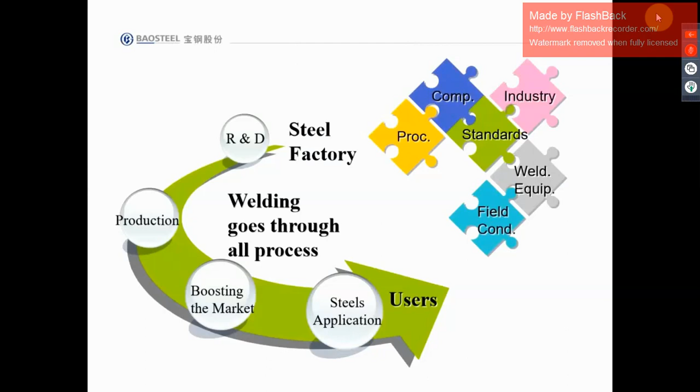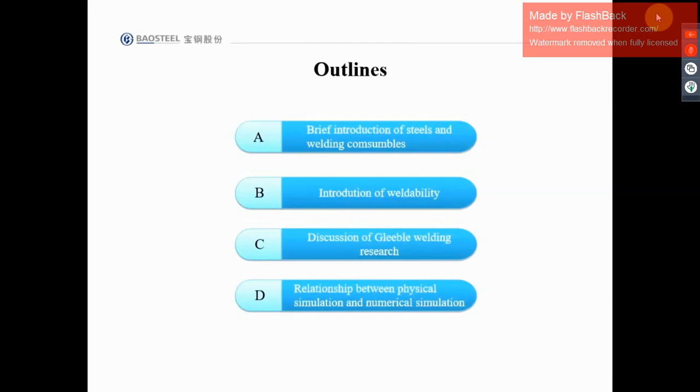There will be 4 parts totally in these slides. Part A is a brief introduction of steels and welding consumables. Part B is introduction of weldability, and Part C is the discussion of Gleeble welding research. Part D is the relationship between physical simulation and numerical simulation. Let's get started. Part A is a brief introduction of steels and welding consumables.

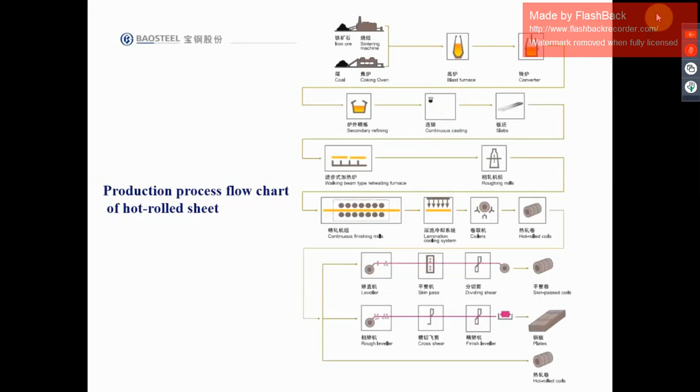This is the production process flowchart of hot rolled sheet, beginning from iron ore and coal and ending in our commercial steel products. Next is our welding consumables.

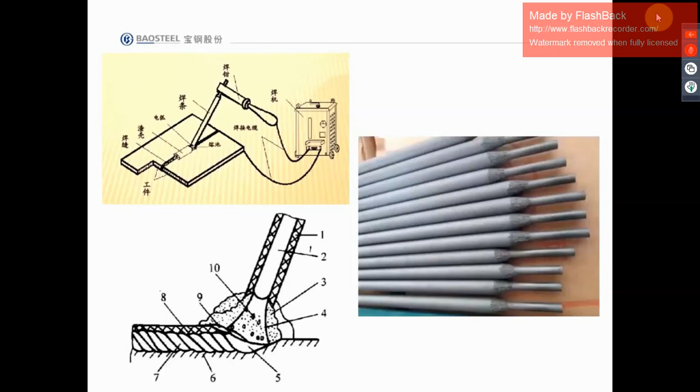This is the electrode of SMAW. The electrode length is about 250 millimeters to 400 millimeters, which are steel rods coated by flux.

This MAG wire is packaged in reels. A standard weight is usually 15 to 20 kilograms. The often-used diameter for it is 1.2 or 1.0 millimeters. Mostly, the MAG welding wire is solid.

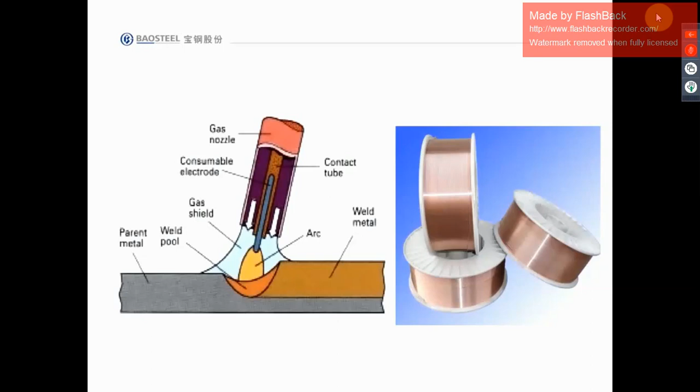For submerged arc welding, the welding consumables are made of welding wires and the matched flux. Of course, there are several kinds of flux, and there are a lot of kinds of welding wire. The biggest difference from MAG wire is their diameter is much larger, usually 4.0 or 5.0 millimeters.

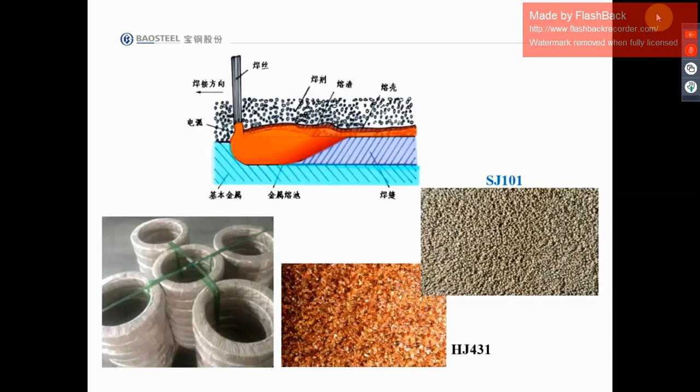For TIG and PAW welding, the welding wire is used as a filler metal, not as an electrode. Usually it is about 1 meter in length, and the diameter usually is 2.4 millimeters.

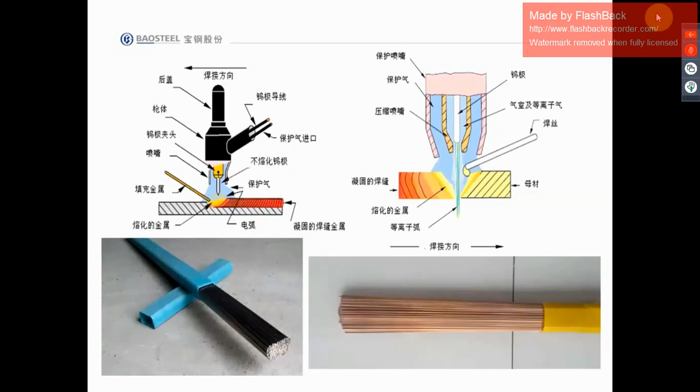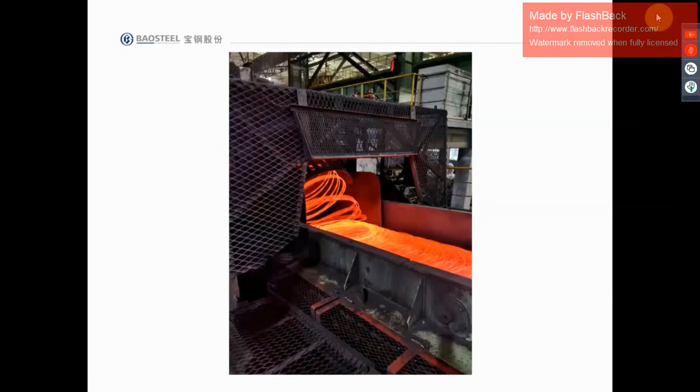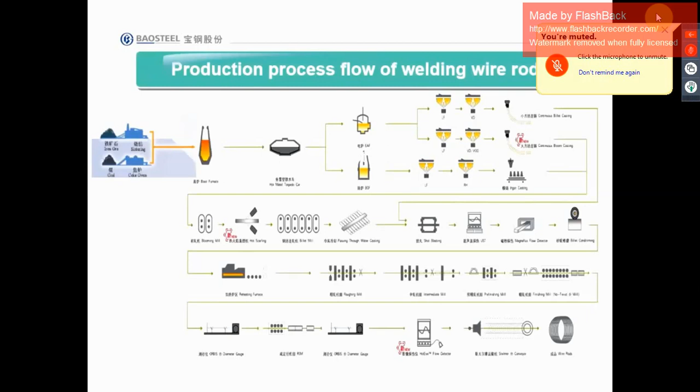This is the production process flow chart of a welding wire rod. It is also the process from iron ore and coal to our commercial steel rod product, very similar to the steel production process.

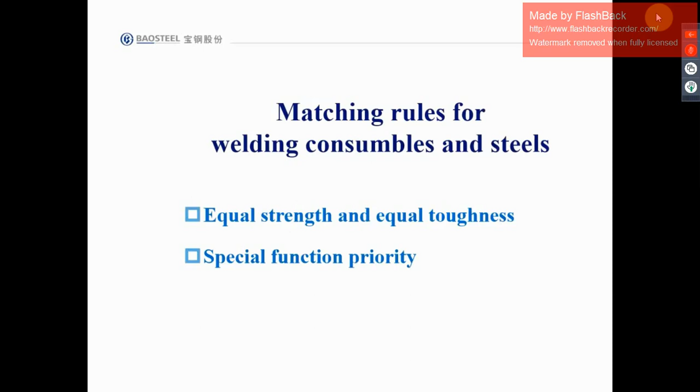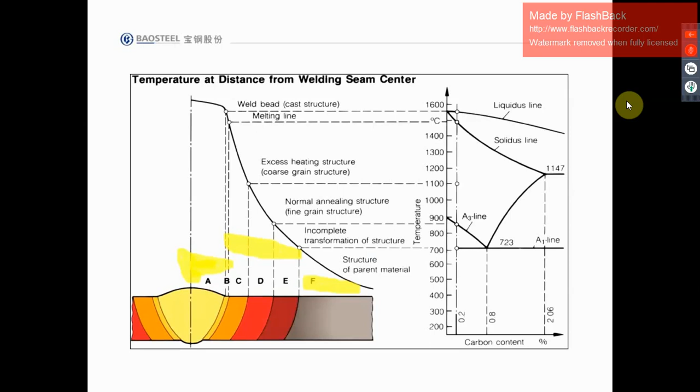What suggestions can be given to improve the properties of the entire joint? This is part A. Next, let's begin part B, an introduction of weldability.

There are two aspects about this concept. One is the sensitivity to weld crack. The other is the range of welding process parameters. For the sensitivity of weld crack, we hope it is as low as possible. For the range of welding process parameters, we hope it is as large as possible.

That is to say, we hope it is large enough, because in that way, welding operators of all levels can do a good job, and our steels can be used in a much wider range of application fields. So the welded joint will have good quality, whatever who makes it, whatever the situation.

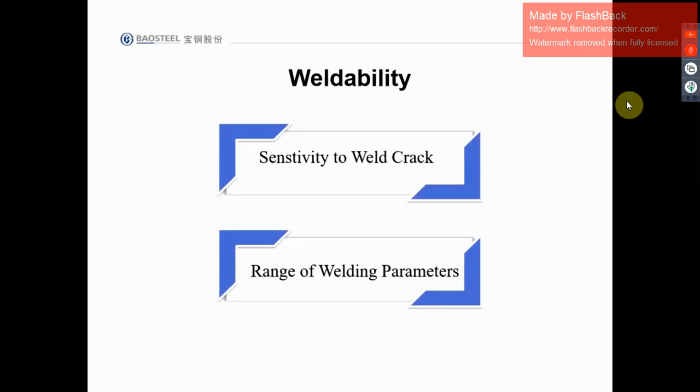In terms of weld crack sensitivity, taking cold cracking as an example, it has three key factors: the first is the hydrogen level, the second is the hardening tendency, and the third is the restraint condition, also called structural constraint. Among these three factors, the hardening tendency reflects the effect of the chemical composition of a steel on its weldability.

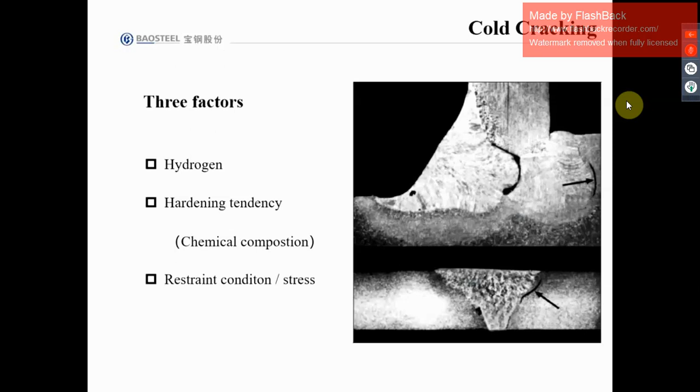As for the range of welding parameters, it depends not only on the SHCCT curve, but also on the range of matched welding heat input, also called the adaptability of different heat input. We hope the heat input is as wide as enough.

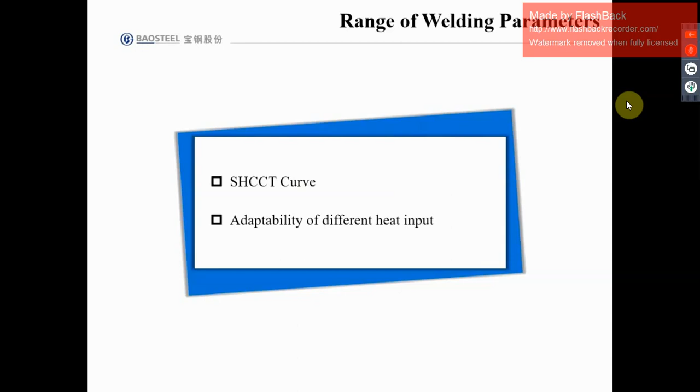Part C is the discussion of Gleeble welding research. This is also the main body of today's topic.

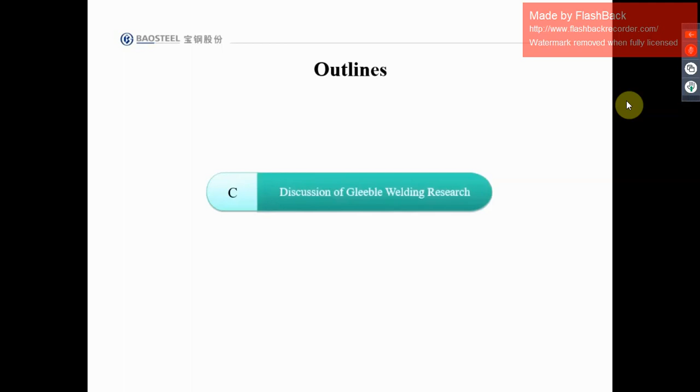Weldability research can be used to direct the composition design of steels and welding consumables. For example, the hot crack tendency can be evaluated by the value of nil-ductility temperature and brittle temperature range, which is obtained from high temperature tensile testing.

The cold crack tendency can be obtained from the test of simulated HAZ hardness.

SHCCT curve is the base of making a welding process specification. The welding process specification we also call WPS. It's very important for our customers to use our products.

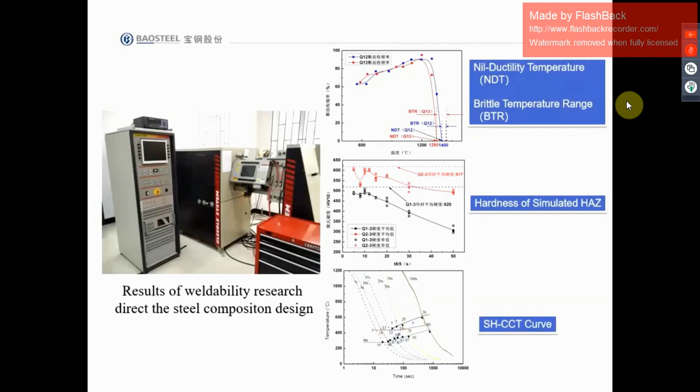Next is a list of some specific Gleeble application scenarios. The first is the microstructure of the simulated HAZ.

We can simulate the microstructure of our interested location in the heat affected zone. The simulation temperature program takes different welding thermocycles with different peak temperature and different cooling rate.

We also characterized with t8/5. In this tester, the samples are usually round.

These are the simulated microstructures of coarse-grained HAZ. From this picture, you can know the peak temperature is 1,350 centigrade, and the cooling rate

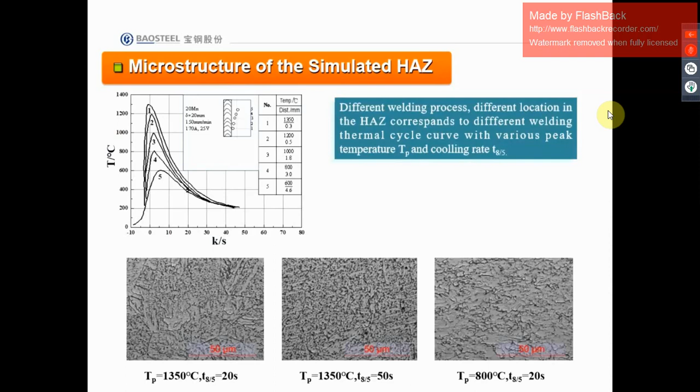The simulated microstructures are in good agreement with actual joints in terms of both the type of microstructures and the grain size. This picture shows the comparison between the simulated and the actual welded joints.

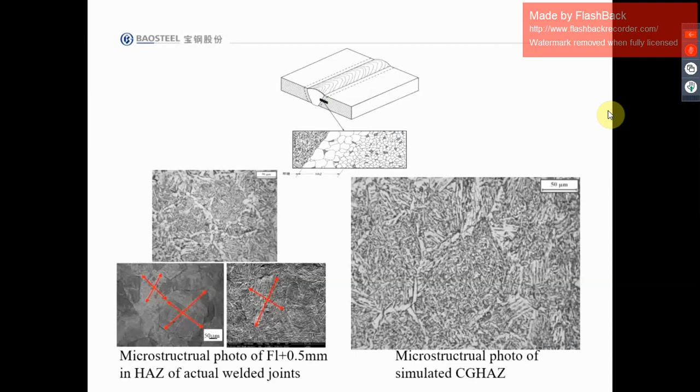This shows that the Gleeble system is very reliable in physical simulation.

Second, the impact toughness of simulated HAZ at the interested position can be obtained. In this tester, the square sample is required.

This is an example we do. And the test is at different peak temperature and different cooling rate.

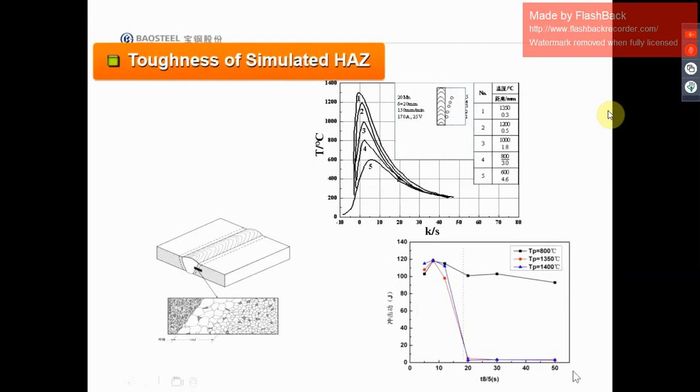Thirdly, SHCCT curves can be investigated and drawn. The round bar samples are heated rapidly to 1,350 centigrade and then cooled at different rates according to designed temperature programs. During the process, the thermal expansion in real time can be recorded so that the transformation points at different

t8/5 can be obtained by determining the temperature of the inflection point in a thermal expansion curve. Meanwhile, the microstructures and hardness at different cooling rates are observed and measured.

Finally, putting the three things together, the SHCCT curve of the material can be drawn like this.

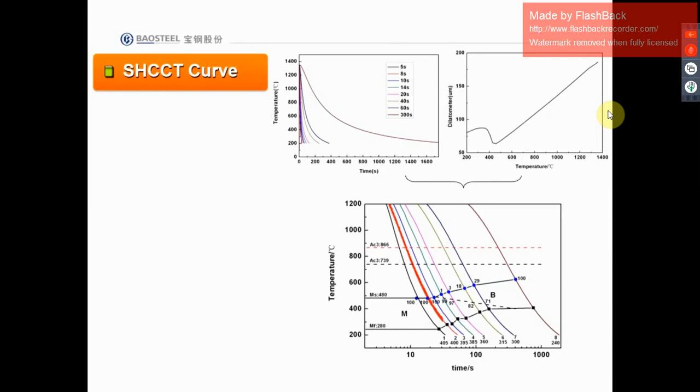This is a SHCCT curve of an ultra high-strength steel produced by BaoSteel. This is just an example.

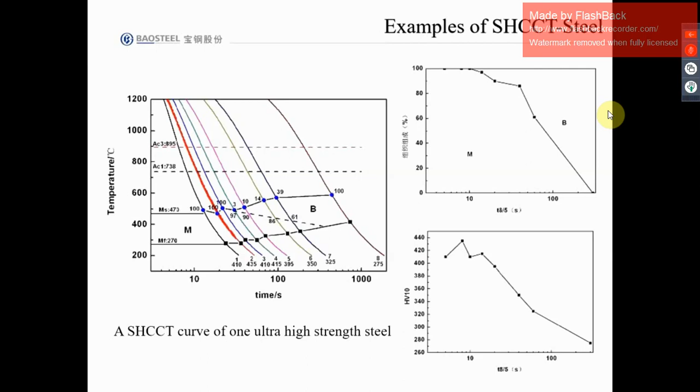This is the CCT curves of a series of ultra-high strength welding consumables. Actually, it's a series of matching welding wire with different mechanical properties.

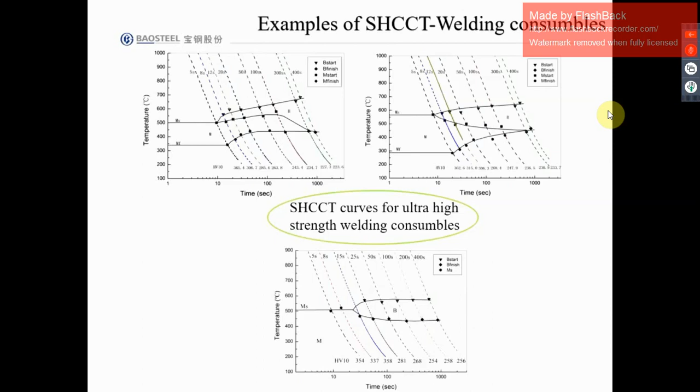Fourthly, a welding process can be analyzed using the Gleeble system. The welding thermal cycles of single-run welding and multi-layer welding can be simulated by designing a series of parameters like the heating rate, the peak temperature, the cooling rate.

Then the microstructures and hardness can be obtained. We can compare and analyze and then decide which welding process is good.

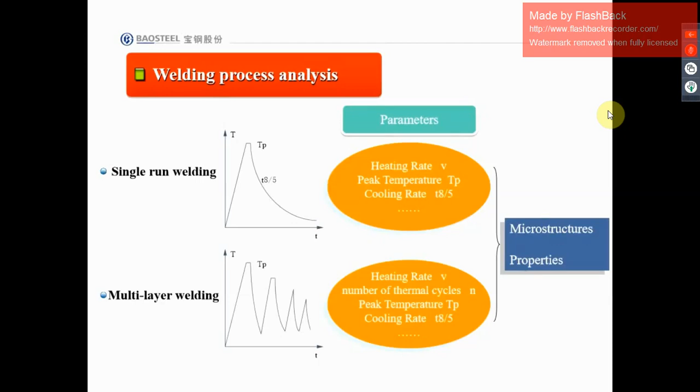This slide shows an example of single run welding, which means that only one welding thermal cycle is applied to samples. We can see the tendency of hardening, softening, and embrittlement of steel's heat affected zone.

Hardening and softening tendency are mainly reflected by hardness tests, while embrittlement property is mainly reflected by the impact toughness test.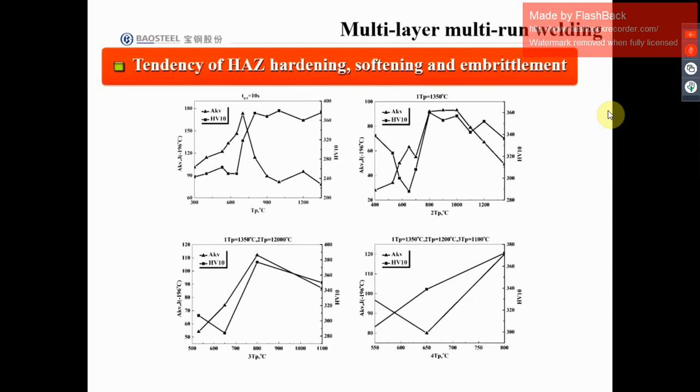Fifthly, a process of post-weld heat treatment can be optimized. Which process is better we can find according to properties and microstructures by simulating different post-weld heat treatment processes using the Gleeble system.

For example, we can design different simulation parameters, such as the heating rate, holding temperature, the holding time, and cooling rate, just like that. For more accuracy, welding residual stresses can also be superimposed.

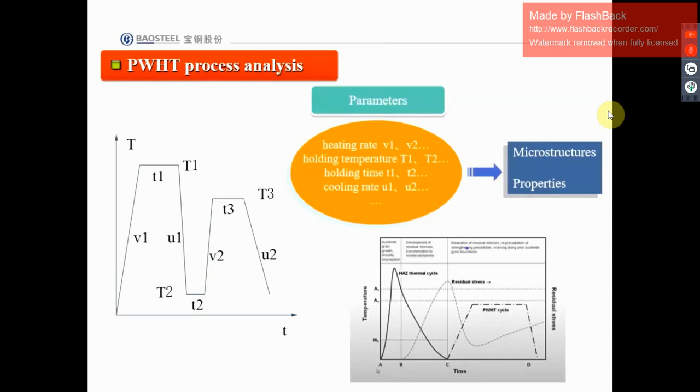Next, we'll introduce the sixth application scenario: measuring the material's high temperature performance data. Some materials' high temperature data, such as yield strength, tensile strength, and reduction of area at elevated temperature, can be obtained directly through the test.

The experiment process is as follows: the sample is heated to a certain temperature, held for some time, and then pulled to break. From this we get direct results. We can also get indirect results, like the nil strength temperature, the nil ductility temperature, the ductility recovery temperature, the brittle temperature range, and the nil ductility range.

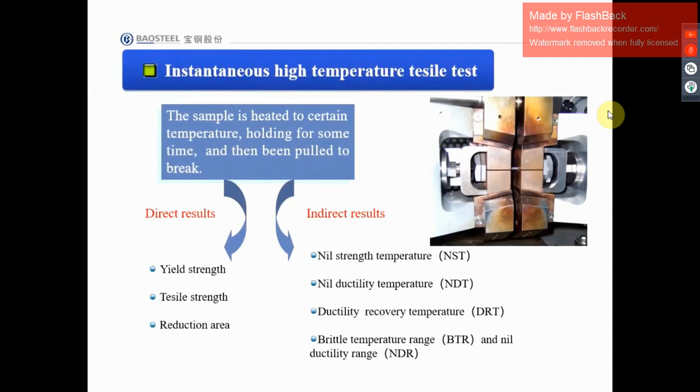These also have special names used by welding engineers. For example, the nil strength temperature we call NST, the nil ductility temperature we call NDT, the ductility recovery temperature we call DRT, the brittle temperature range we call BTR, and the nil ductility range we call NDR. What do these mean? We'll introduce next.

The NST can be used as a criterion for weld solidification cracking. What is the NST? It means the strength will be zero when the temperature is over the NST, meaning any small load applied will lead to cracking.

Hot crack: a crack formed at temperatures near completion of solidification, including weld solidification cracking, HAZ liquation cracking, and weld metal liquation cracking.

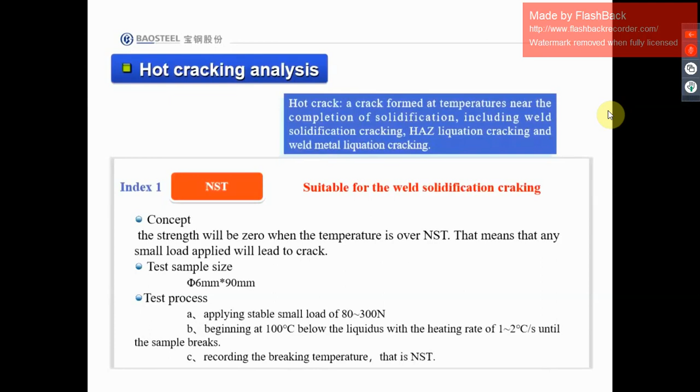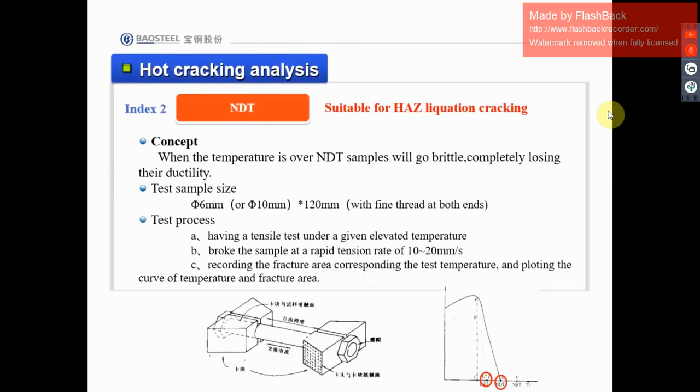The NDT is also a good index for HAZ liquation cracking. When the temperature is over NDT, samples will go brittle, completely losing their ductility. In this, I won't introduce the experiment process.

The values of BTR and NDR can be further used as criteria for both forms of hot cracking, that is the solidification cracking and the liquation cracking. The BTR is the temperature range near the solid phase line when solid and liquid coexist. NDR is the temperature range near the weld in HAZ when the ductility is close to zero.

So this data we often use in our company, in our research.

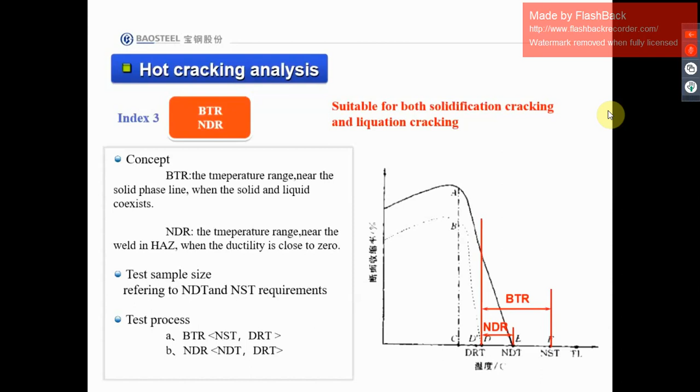Seventhly, it can be used to analyze the tendency of reheat cracking. For example, reheat cracking occurs when the HAZ is reheated during post-weld heat treatment or under high service temperature.

We apply a welding thermocycle to samples first, then do tensile tests at different high temperatures after holding for some time. We record the area reduction and yield strength corresponding to various high temperatures, and calculate the reheat cracking sensitive temperature range, judging the reheat cracking tendency based on that range.

Through this, we can analyze the steel's reheat cracking tendency.

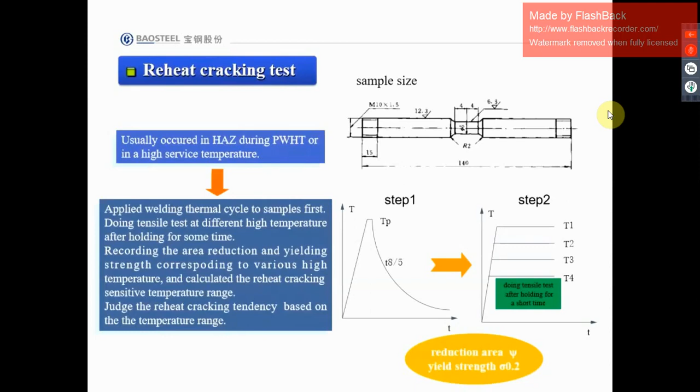Last but not least is analyzing cold cracking tendency. Applying three factors together to the samples - hardening microstructures, a certain amount of hydrogen, and welding stresses - we can get data about cold cracking sensitivity for various steels. Because cold cracking is very important for us, there are a lot of experiments to evaluate it, and physical simulation is just one of them.

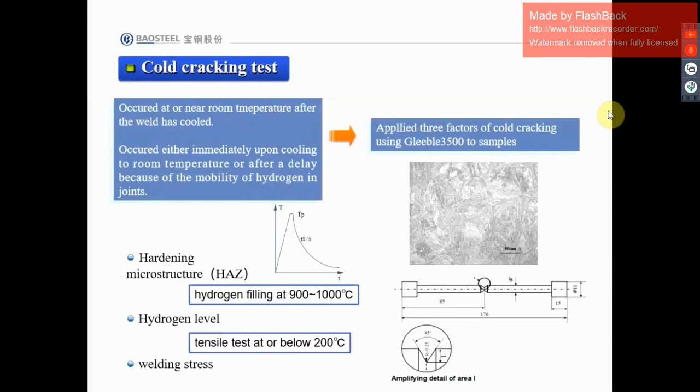Next, let's look at some specific application cases of Gleeble welding research at BaoSteel. Case 1 is the weldability research of an ultra-high strength steel produced by BaoSteel. For a newly developed steel product, generally its SHCCT curve should be plotted as early as possible. The SHCCT samples are round, as shown in the picture.

There are two types of samples. The first one is used when the cooling rate is very fast.

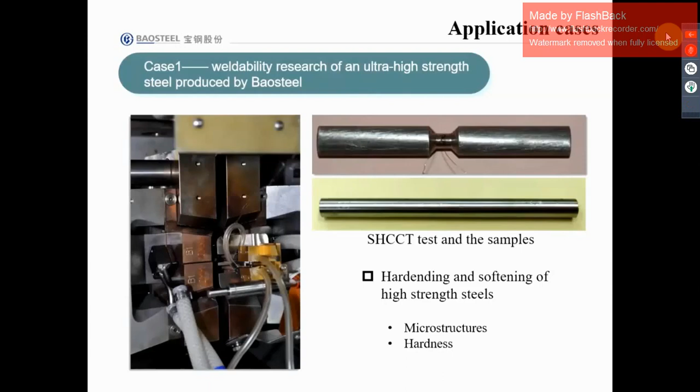Microstructures of simulated coarse-grained HAZ are shown in this slide. The thermal cycles have a peak temperature of 1350 centigrade, and the cooling time T8/5 is different, ranging from 5 seconds to 300 seconds. So the microstructure is different - we can see how the microstructure evolves with different cooling times.

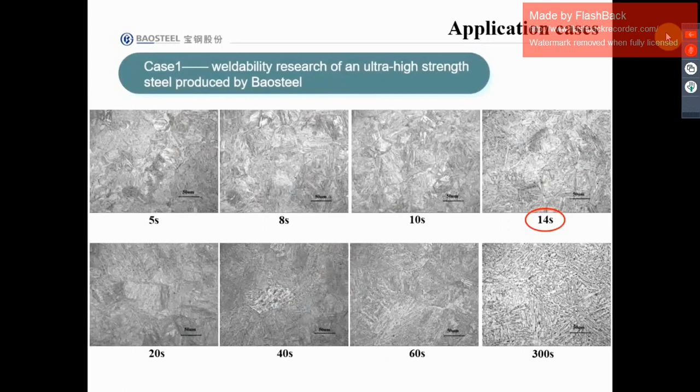This is the final SHCCT diagram of an ultra-high strength steel, including hardness, microstructure, and transformation information. It can be seen from this SHCCT curve that martensite will be found over a wide range of cooling rates, meaning the steel has a strong tendency toward cold cracking. So cold cracking should be given more attention when establishing the welding process specification.

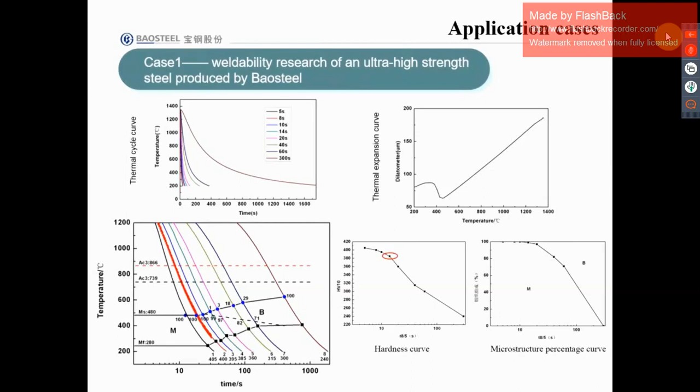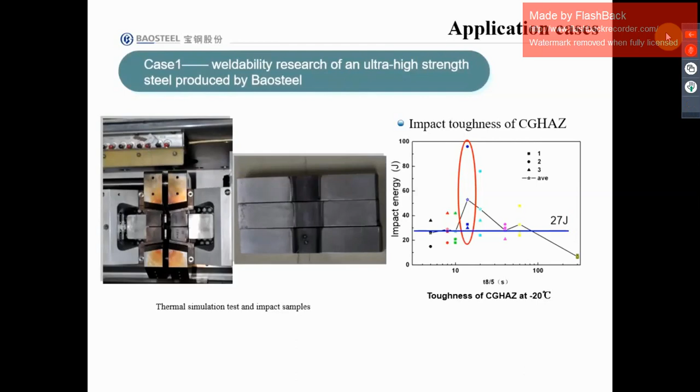This picture shows the impact toughness of a simulated coarse-grained heat-affected zone at different cooling rates, tested at a low temperature of minus 20 centigrade. From this picture, it is known that the coarse-grained HAZ has the best property when the T8/5 is 14 seconds.

Next, we talk about case 2, which is measuring high temperature strengths of steels. The actual temperature curve performed by the Gleeble system is in good agreement with the design. The sample for high temperature tensile testing is shown in this picture.

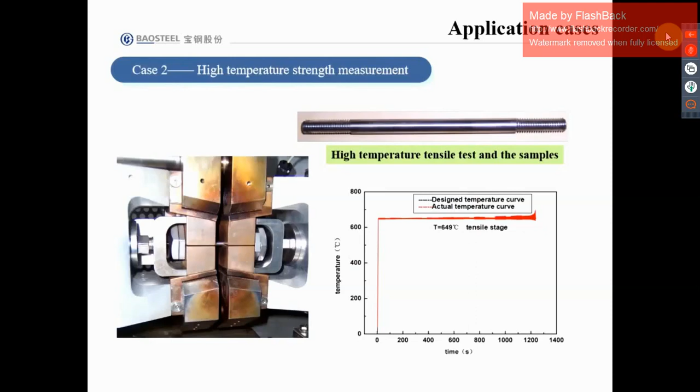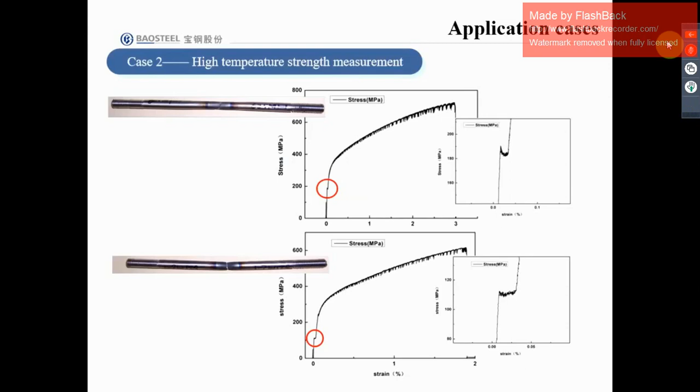The stress strain curves can be recorded when the specimens are pulled at a certain temperature, so we can get the yield strength of steel with different chemical composition design. Analyzing and comparing the results, the steel with chemical composition that meets the requirements of high temperature strength can then be selected. So it is very useful for us to select the steel's chemical composition.

Case 3 is about reheat cracking research. Reheat cracking occurs when the welded joints are reheated within a certain temperature range, such as the post-weld heat treatment. The stress-relieved heat treatment is a common PWHT heat treatment. It's common for pressure vessel steels and heavy plates. Usually, a reheat crack starts in the coarse-grained heat-affected zone and ends in the fine-grained HAZ.

The test process is as follows. The first step is to form a weld metal and its HAZ by carrying out TIG spot welding in the center of the sample. The second step is to apply a certain strain at a specific high temperature. The last step is to check cracks by metallographic inspection. The post-weld heat treatment process or the chemical composition design of some tensile steels can then be optimized according to the test results.

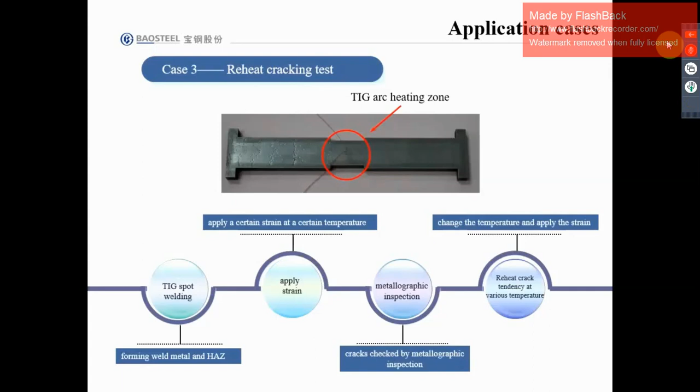This is the metallographic observation of the welding zone at the temperature of 780 centigrade with different strain. It's from 6%, 12% and 20% strain respectively. In the end, the excessive strain, for example the strain of 20%, causes the sample to break.

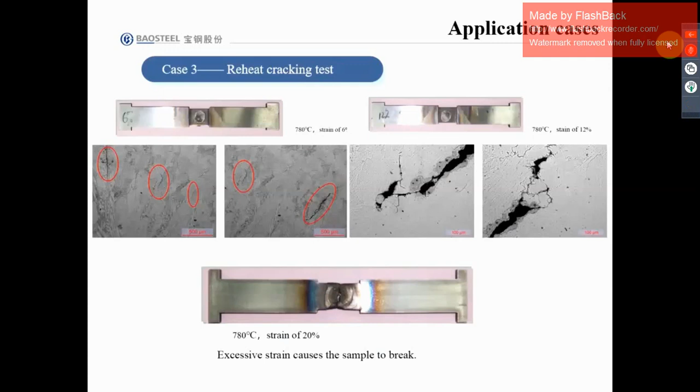So this is all about part C.

Next, let's introduce part D. Part D is about the relationship between the physical simulation and the numerical simulation.

Generally speaking, nowadays numerical simulation is becoming more and more in fashion. Today I want to emphasize that physical simulation is the base of the numerical simulation. And if the numerical simulation is based on physical simulation, then it will be more accurate and have a better application.

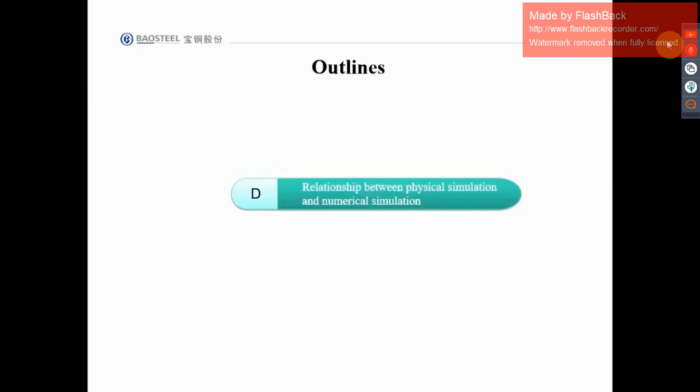So let's look at an example in our company. Numerical simulation is very useful, and this is an H-beam made of hot-rolled ultra-high-strength steel. The H-beam is the main load-bearing member, so there are strict requirements for its size and deformation. The deformation is mainly caused by welding. The different levels of welding deformation represent the different manufacturing levels of the company.

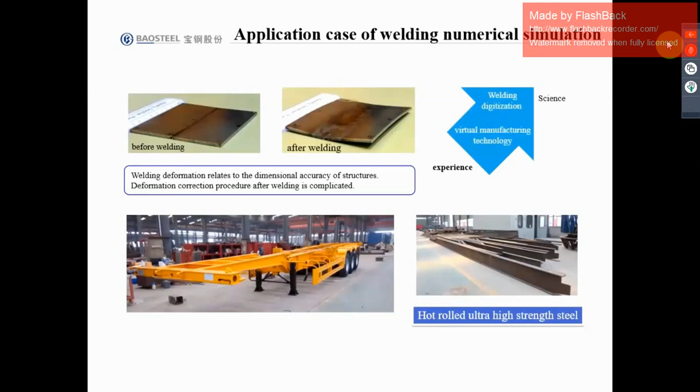The welding process involves a coupling among temperature, microstructure, structure and stress. So the deformation of the weld structure contains three factors: the mechanical, the thermal, and the metallurgical factor. So the welding deformation of the structure also comes from these three sides.

Just like the equation, the total welding deformation equals the elastic and plastic strain. They belong to the mechanical analysis, so we should consider them.

For the third part is the thermal strain. This is the thermal analysis. The thermal strain is caused by different welding processes. The last one is for metallurgical analysis. The metallurgical strain is caused by martensite transformation. It should be considered for high and ultra-high strength steels.

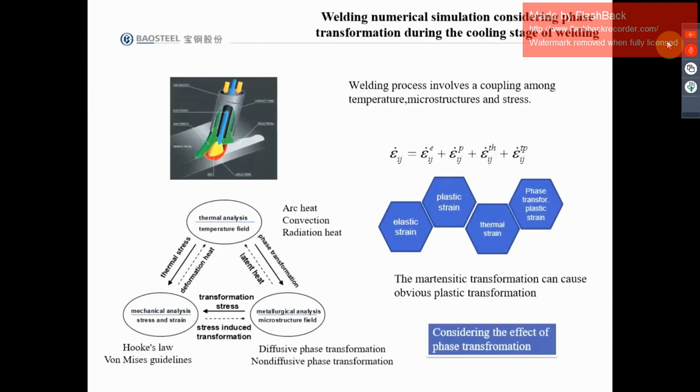So the welded joints include three parts roughly. It is the weld metal, mainly made of the welding consumables. And the base metal, it is ultra high strength steel. And its HAZ, the heat affected zone, can also be divided into several parts. Their mechanical properties are very different.

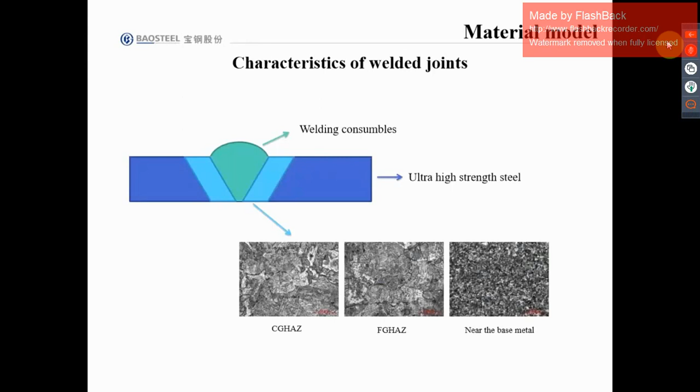So in the material model of the numerical simulation, the three parts should be considered respectively if you want a good effect. In the material model, the physical parameters of the 3 parts must be considered, such as specific heat capacity, thermal conductivity coefficient, density, elastic modulus, Poisson's ratio, yield strength, and linear expansion coefficient.

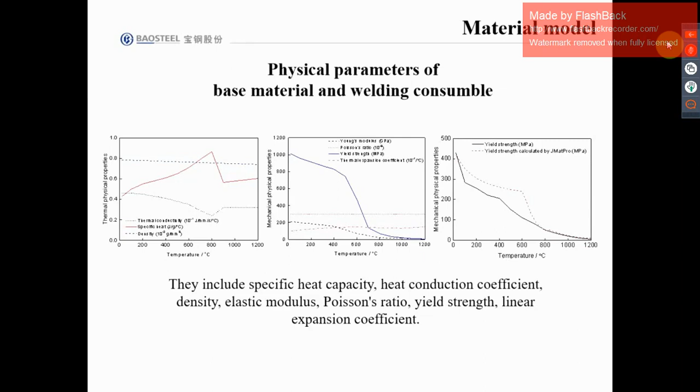Gleeble system can be used to measure the SHCCT curve of the base metal and of the welding consumables. If this data can be input to the material model of the numerical simulation, then the numerical simulation will be accurate.

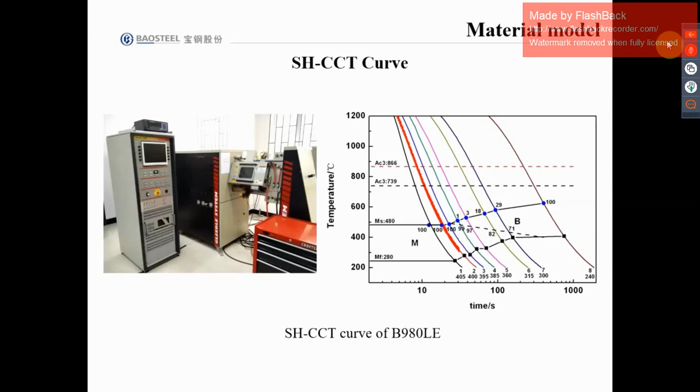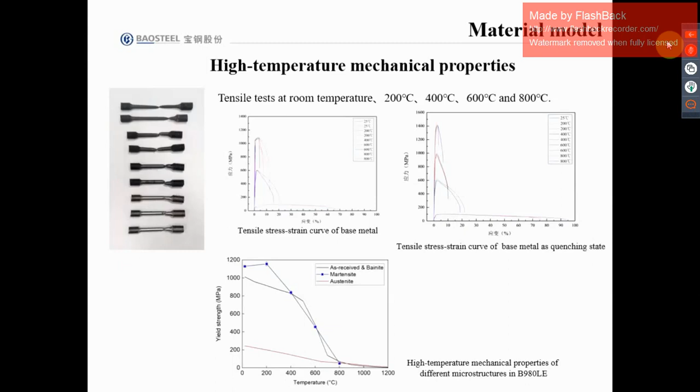We also can get the yield strength at a series of high temperatures through the Gleeble system testing. Once these data are input to the material model, the result of the numerical model will be perfect. We try to do this.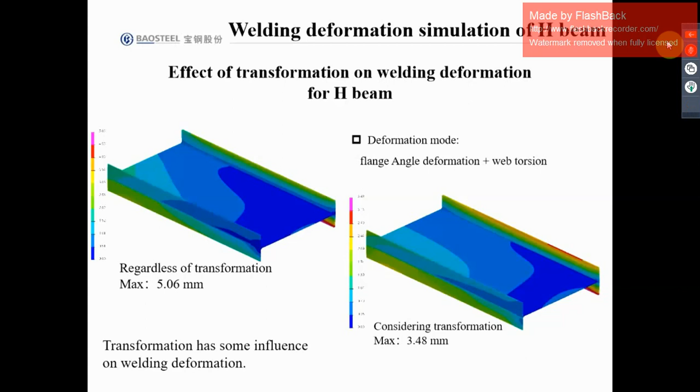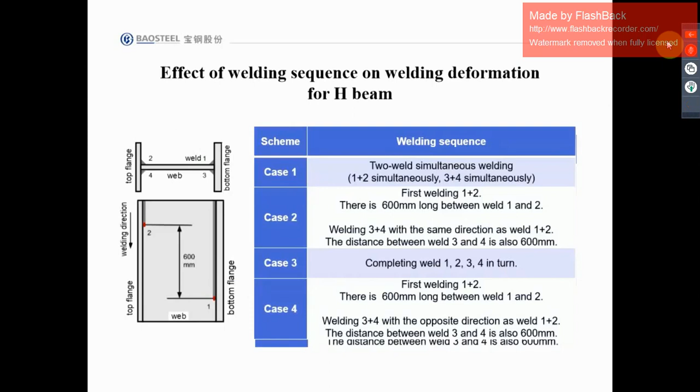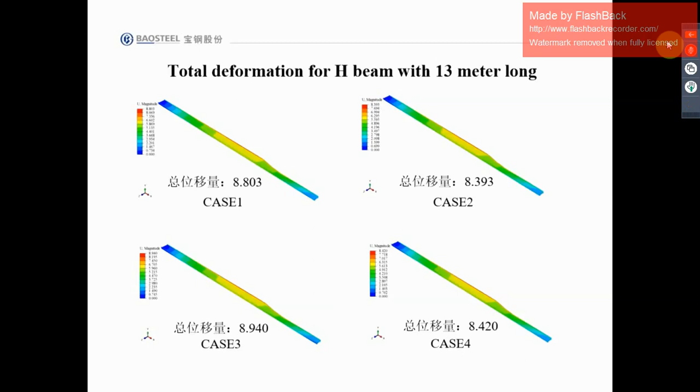The difference between case 2 and case 4 is the welding direction. In case 2, the welding direction on both sides of the H-beam is the same way, while in case 4 it is the reverse direction. Since the total deformation of both processes is very small, does that mean both processes work well?

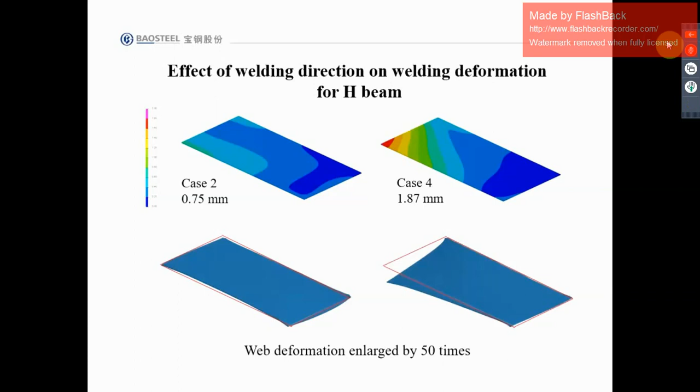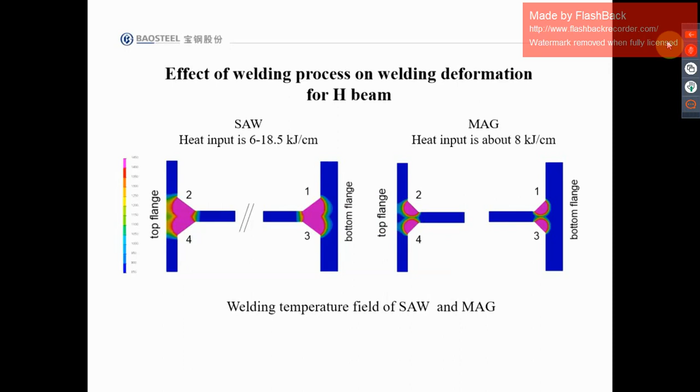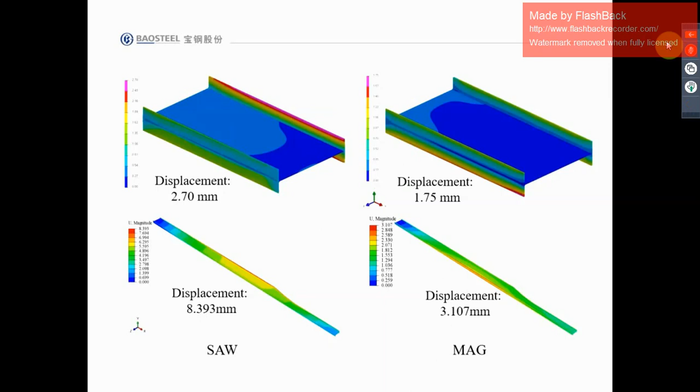These are some very useful results for our customers to apply to high strength steel or ultra high strength steel. These results of numerical simulation are very useful to help our customers improve their welding quality. However, please remember, physical simulation is the base of the numerical simulation—it is the key to building a better model for numerical simulation.

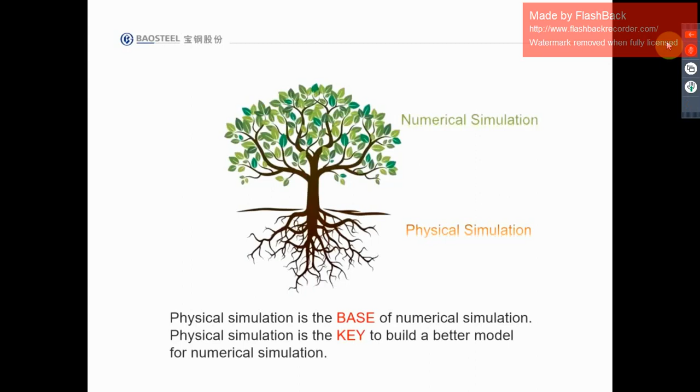That's all we're sharing with you today. Thank you for your attention. I hope you all enjoyed the presentation.